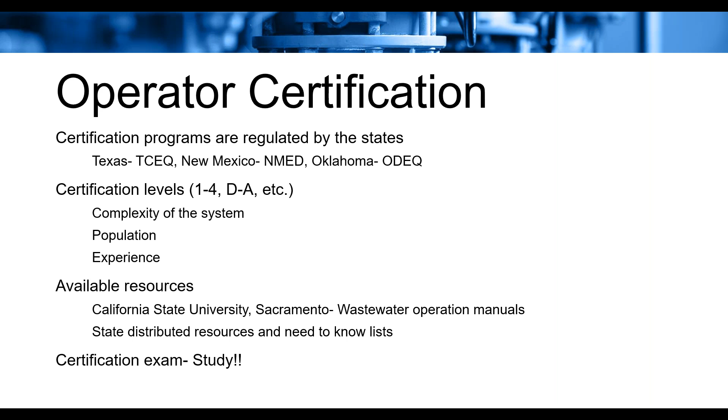So I just want to point out that this webinar is designed to give a good overview and provide you guys with the topics that you're going to become really familiar with for your certification exams.

All right, with that being said, we're going to start our presentation about our modified treatment processes.

Modified treatment processes refer to variations or adaptations of conventional wastewater treatment methods that have been modified to improve efficiency, enhance treatment capabilities, or address specific wastewater characteristics. These modifications can be made to various stages of the treatment process as well.

Examples of this are membrane bioreactors, sequencing batch reactors, advanced oxidation processes, and even constructed wetlands, which may be considered a modified treatment process. I accidentally included anaerobic digestion on there, but we will not be covering that. We're going to talk about constructed wetlands instead.

This webinar will mostly cover membrane bioreactors and sequencing batch reactors, but we will also briefly touch on advanced oxidation processes and constructed wetlands.

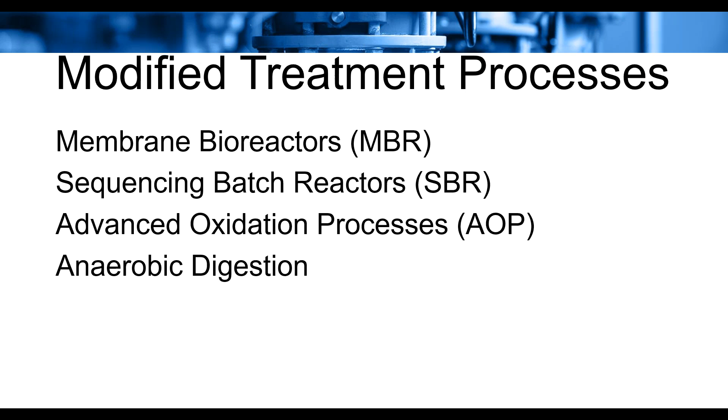So with that being said, we're going to start with our membrane bioreactors. Basically, a membrane bioreactor, or what we're going to call for the rest of the presentation, MBR, is a wastewater treatment process that combines the traditional or more widely used principles of biological treatment and newer membrane filtration technologies.

Just like in typical biological wastewater treatment processes, the biological reactor provides an environment for microorganisms to break down and consume organic matter present in the wastewater. But the caveat is there's also a membrane filtration system, which is the key feature of the MBR that differentiates them from traditional wastewater treatment processes.

This separates the treated wastewater from the microorganisms and suspended solids, and it consists of a fine pore-sized membrane that acts as a physical barrier. The membrane allows the passage of treated wastewater while retaining the suspended solids, bacteria, and other microorganisms within the reactor. The membrane effectively removes suspended solids, pathogens, and most of the dissolved contaminants from the treated water.

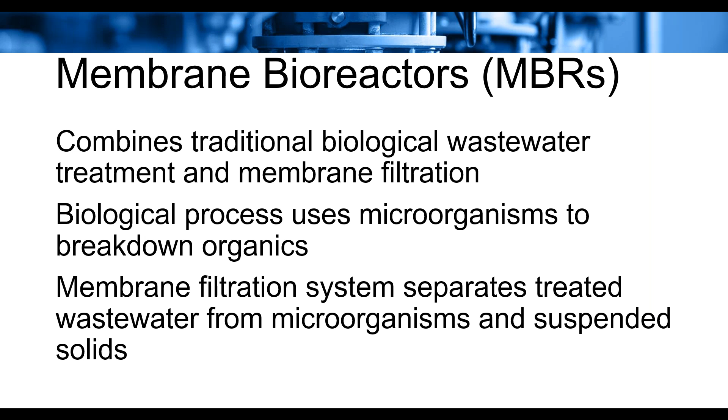So now that we've mentioned briefly what it is, we're going to talk about some of the advantages that MBR systems have.

MBR systems have several advantages over conventional wastewater treatment methods, such as they produce high quality effluent that can be reused for a variety of purposes, such as irrigation or industrial processes.

MBRs also have a smaller footprint compared to traditional treatment systems, since they eliminate the need for a separate clarifier or sedimentation tank. They also allow for higher concentrations of microorganisms, reducing the size of the needed bioreactor. The small footprint means they can be ideal for locations with spatial limitations.

Additionally, MBRs are highly effective in removing suspended solids, pathogens, and nutrients, resulting in improved water quality. They can be operated at higher SRTs than other biological processes, with typical MLSS concentrations of 8,000 to 12,000 milligrams per liter, and even as high as 15,000 to 25,000 milligrams per liter.

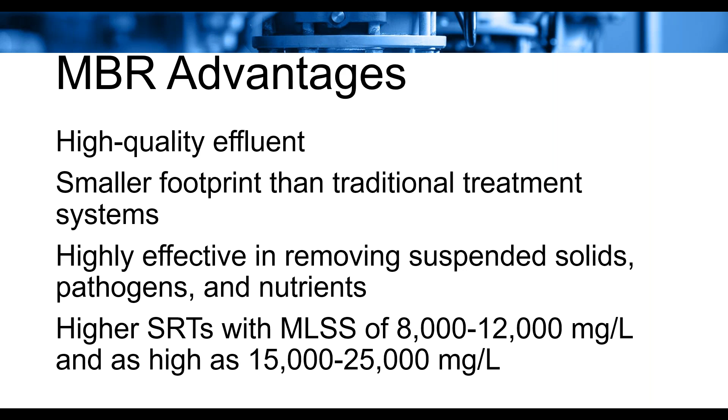So with those advantages, they also have a few issues and challenges that they need to overcome. The fouling of the membrane is the most typical one, and that's due to the accumulation of solids that reduces system efficiency and requires periodic cleaning.

Fouling can be mitigated through a variety of strategies such as air scouring, backwashing, or chemical cleaning. We'll go into that a little bit more later on in the presentation. They also require regular maintenance and monitoring to ensure proper operation. Fouling, maintenance, and monitoring can cause MBRs to be less cost effective than other wastewater treatment processes as well.

Now we're going into a little more detail about the MBR process, and there are usually about 8 steps in the MBR process, which we've laid out here. First, the wastewater to be treated is collected and transferred to the MBR system. The wastewater can come from a variety of sources, such as municipal sewers or industrial processes.

Next, just like in large-scale wastewater treatment plants, MBR wastewater treatment plant processes should include a pre-treatment process to protect plant equipment, especially membranes, which are highly susceptible to damage in the presence of high levels of debris. These membranes are usually made from very fine materials.

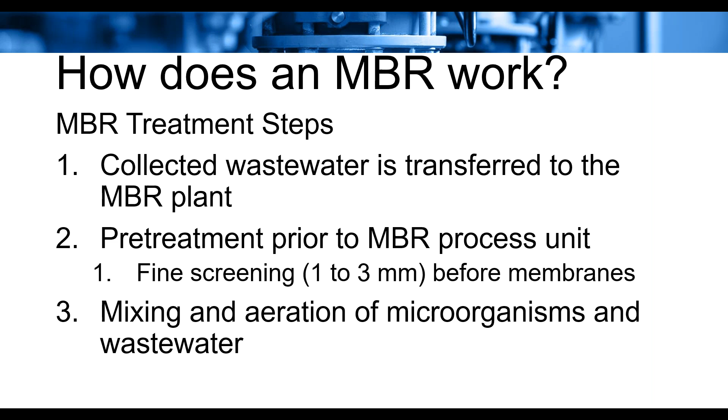Then our fourth step: after the biological treatment, the treated wastewater containing microorganisms and suspended solids is then subjected to membrane filtration. The membrane is located within the biological reactor and acts as a physical barrier with fine pores. As the wastewater passes through the membrane, it filters out the suspended solids and microorganisms. The treated water is collected and now ready for further treatment, use, or discharge.

Now, our sixth step is that within the MBR system, the accumulation of biomass and solids on the membrane surface is referred to as sludge. I'm sure lots of you are familiar with this topic because that's typically how it's referred to in wastewater. And this sludge needs to be managed to maintain system efficiency.

Some MBR systems utilize a portion of the treated biomass within the reactor to maintain the biological treatment process, while excess biomass, known as waste-activated sludge, may be periodically removed. This practice is similar to what we frequently see in activated sludge processes, and the removed sludge can undergo further treatment processes such as dewatering or digestion to reduce its volume and facilitate disposal or beneficial reuse.

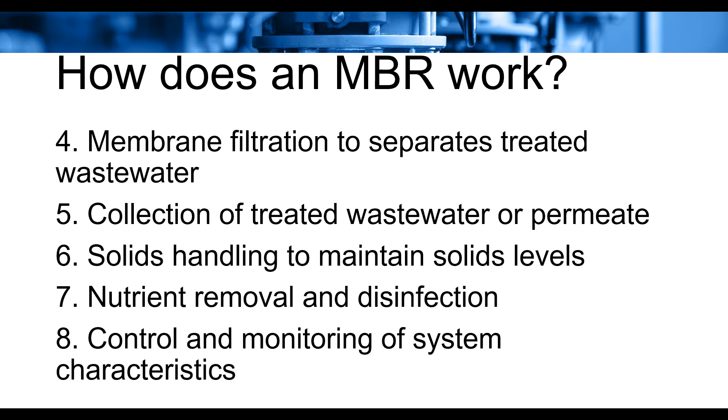And our final step in an MBR, the one that occurs throughout the process, is control and monitoring. MBR systems require regular monitoring and control to ensure optimal performance. Some of these parameters that are monitored may be dissolved oxygen levels, pH, and membrane fouling, and they can be adjusted to maintain efficient operation.

So here is a diagram of the MBR process. And if you'll see, this looks very similar to other activated sludge processes where we'll have our pretreatment followed by our anoxic and oxic zones. But the difference is that you'll typically see an oxic zone with the membranes in it, over here in the middle of the screen where it says aerobic plus ZeeWeed, which is a brand provided by the EPA fact sheet.

Then after that, you have your turbidity readings and your clean-in-place tank, which monitors the turbidity of the water to verify if it's being filtered correctly, and will actually rerun the water through the filters if needed. And this is a configuration for an immersed MBR.

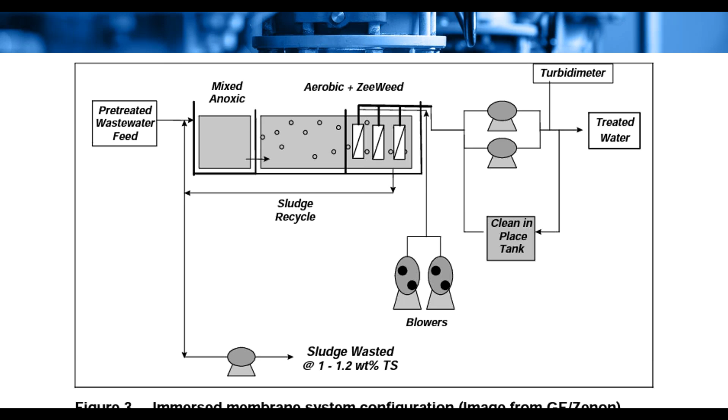So now that we know about the overall process of MBR wastewater treatment, let's talk more in depth about the crucial role membranes play in MBR systems. They facilitate the separation of suspended solids, microorganisms, and other contaminants present in the wastewater. They act as a physical barrier and selectively allow the passage of water molecules while retaining the larger particles and microorganisms.

So let's go over a couple steps of what exactly these do, because understanding membrane function is crucial to understanding our MBR. So the filtration process in MBRs occurs as the wastewater passes through the membranes. The wastewater contains suspended solids, microorganisms, and treated water like we talked about. The treated water applies to one side while the contaminants are on the other. I'm going to show you guys a diagram on the next section about how that occurs.

The membranes are designed with pores of a specific size, depending on the desired filtration efficiency and the characteristics of the wastewater being treated. Membranes in MBRs employ a size exclusion mechanism to separate the particles and microorganisms from the treated water. The membrane pores are typically in the range of microfiltration to ultrafiltration. As the wastewater flows through the membrane, particles larger than the pore size are retained on the membrane surface or within the membrane structure.

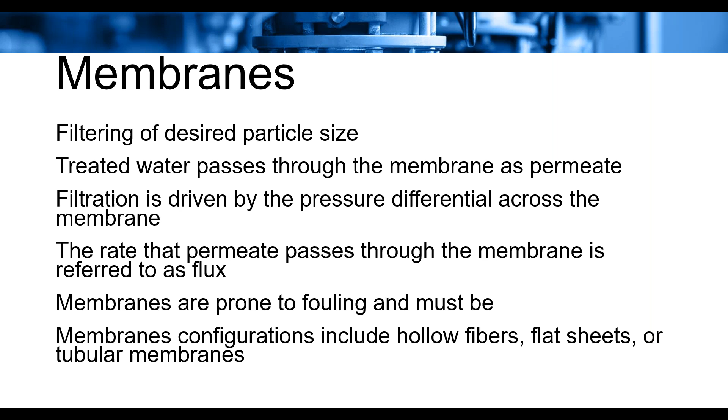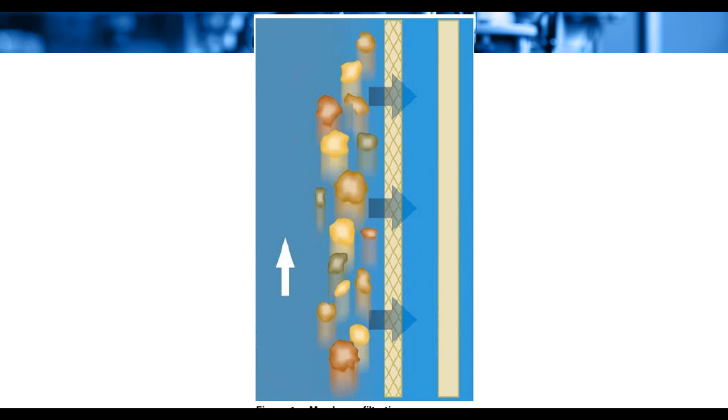So this is typically what's happened on the left. You'll see particles will be in there, and the water looks a little dirtier. On the right, there'll be clean water. Also, if this is an immersed system, biological activity will be continuously going on the left side as well, breaking down organics.

We've touched on this previously, but I wanted to reiterate that there are two products created during membrane filtration. The first is permeate, which we've already described as the clean water product after the filtration process within the MBR. Permeate is the desired product of the MBR process, and the quality of permeate dictates the design considerations and operation optimization of the MBR.

Then the other product we want to know is concentrate. The concentrate refers to the concentrated wastewater stream that remains after the membrane filtration process. It is also known as the reject stream or the retentate. The concentrate contains the majority of the solids, microorganisms, and dissolved contaminants that were present in the influent wastewater.

In many cases, MBR systems may incorporate a concentrate recycle or reuse strategy. This involves redirecting a portion of the concentrate stream back into the influent wastewater to enhance treatment efficiency or reduce the overall volume of concentrate generated. This approach requires careful consideration of the impact on the system, how much this may increase fouling, and potential contaminants in the recycled concentrate.

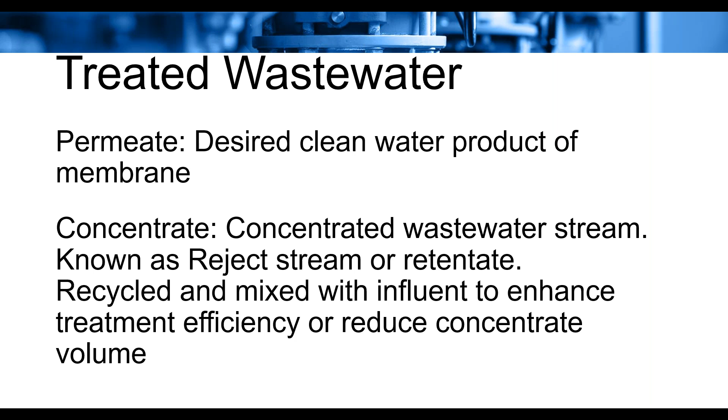So next we're going to talk about pressure. As we mentioned, membrane filtration relies on pressure and the pressure differential across the membrane for the process to proceed. Now, there are two types of pressure differentials that may exist across an MBR membrane.

There is the transmembrane pressure, or TMP, created by applying a high pressure on the feed side of the membrane compared to the permeate side. This pressure difference pushes the wastewater through the membrane, allowing clean water to pass through while retaining the solids and microorganisms. It can be created in a variety of ways, including a pump-driven system, where a pump pushes the wastewater on the concentrate side, and the clean water will force its way through the membrane to the permeate side.

There are sensors placed on both sides of the membrane to measure the pressure differential, and it's used to monitor for changes that indicate fouling or other issues in the system.

In addition to the transmembrane pressure, the hydraulic pressure generated by the flow of the wastewater can also contribute to the driving force for membrane filtration. As the wastewater flows across the membrane surface, the hydraulic pressure helps propel the water through the membrane pores, facilitating the separation of the treated water from the solids and microorganisms. It's also worth noting that the pressure required for membrane filtration can vary depending on the membrane type, configuration, and the specific characteristics of the wastewater being treated.

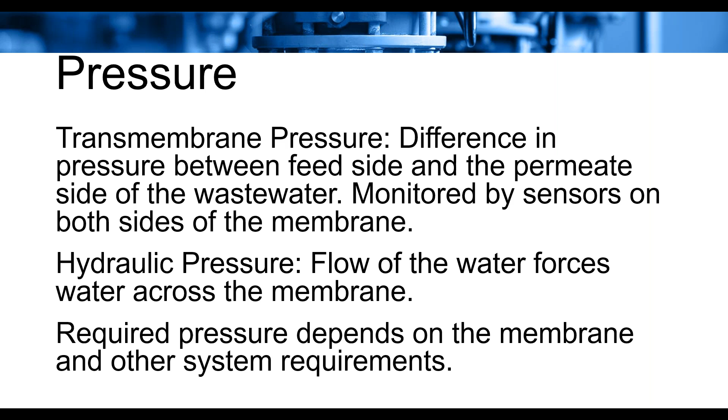As we mentioned earlier, flux is the rate at which treated water passes through the membrane per unit area, and this is typically driven by the pressure we just talked about. Flux is typically expressed in terms of the volumetric flow rate per unit membrane area, such as liters per square meter per hour, as shown here, or gallons per square foot per day, also referred to as GFD. It represents the amount of permeate that can be produced or processed by the membrane in a given time.

It's important to remember that MBRs generally operate at a flux between 10 and 150 LMH. This varies widely based on the system. Some things that influence flux are the transmembrane pressure, membrane characteristics, the fouling that's occurred in the system so far, and membrane integrity - how well that system may be holding up. The relationship between fouling and flux is especially important, because increased fouling leads to a decrease in your flux rate.

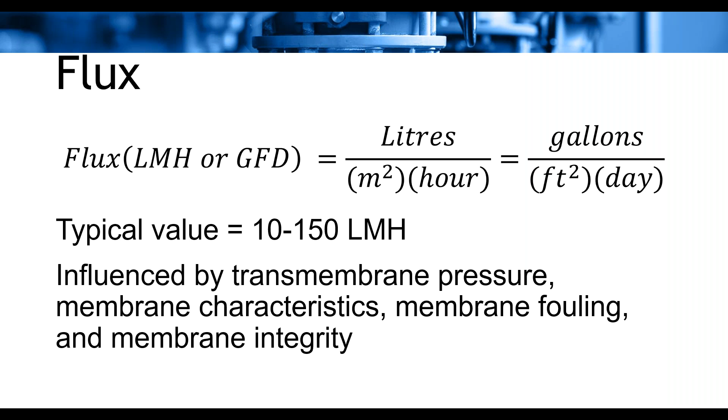As we mentioned before, fouling is a frequent issue for MBRs. It decreases your flux rate and the overall performance of your MBR. Here are a couple examples of how this occurs. Fouling is caused by fine suspended solids in the influent wastewater that can deposit and accumulate on the surface of the membrane and within the pores, including organic matter, colloids, bacteria, and other particles.

The first we're going to talk about is biological growth, which is typically caused by microorganisms, including bacteria and biofilms that attach and grow on the membrane surface, leading to biofouling. The growth of microorganisms can result in the formation of a slimy layer that impedes the permeate flow.

Then there is scaling, which occurs when dissolved inorganic compounds in the wastewater, such as calcium carbonate or calcium phosphate, precipitate and form deposits on the membrane surface. Scaling can also reduce the effective pore size and decrease membrane permeability.

The last cause of fouling that we're going to talk about is organic fouling, where certain organic compounds in the wastewater, such as proteins, humic substances, or oils, can adsorb onto the membrane surface, resulting in fouling. This adsorption can occur due to electrostatic interactions or hydrophobic/hydrophilic interactions.

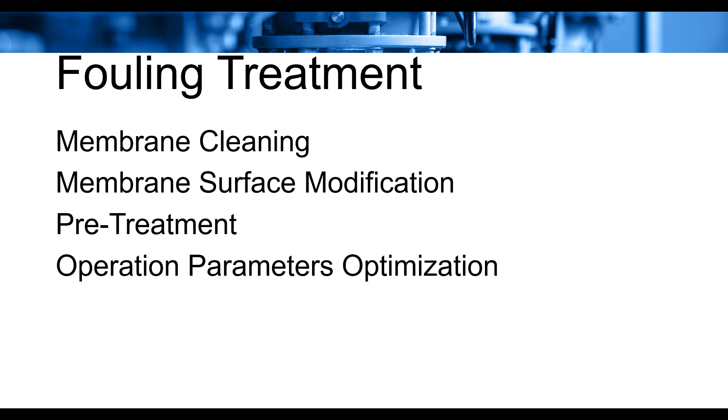There are a couple of different ways that membranes can be configured, and we're going to talk about those since we've finished with principles. Membranes can be immersed directly into the bioreactor, as we saw earlier, or installed as a separate system following the biological process. In an immersed membrane bioreactor, the membranes are submerged directly into the mixed liquor within the biological reactor. The membranes are typically placed within the reactor as modules or bundles, and they are fully immersed in the wastewater. The mixed liquor flows over and around the membranes, and the filtration process occurs as the treated water passes through the membrane pores.

In a separate membrane bioreactor, the membranes are physically separated from the biological reactor, and the mixed liquor from the biological reactor is transported to a separate filtration tank or module where the membranes are housed. The filtration tank is designed to create a pressure difference across the membranes and allows the treated water to pass through while retaining the solids and microorganisms.

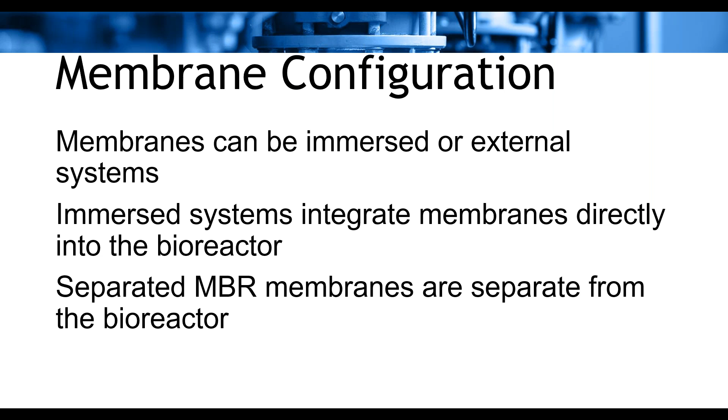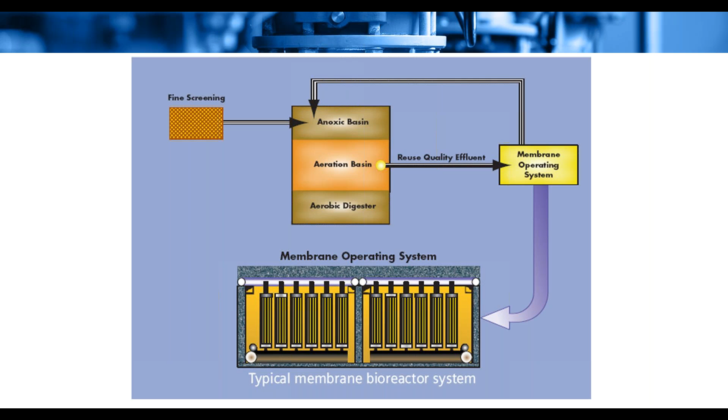We saw this one earlier, but this is an example of the immersed membrane system. As you can see, the biological process will be happening at the same time as filtration is occurring.

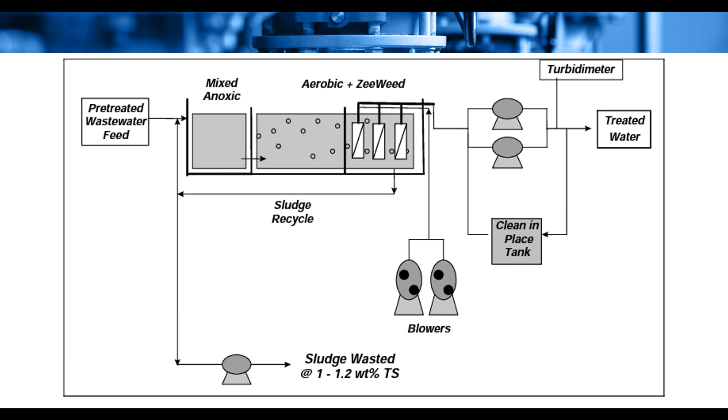So there are two common types of membranes used in the MBR system: microfiltration, which we mentioned earlier, and ultrafiltration. Microfiltration is referred to as MF and ultrafiltration as UF.

MF membranes have a larger pore size and provide relatively lower filtration efficiency, and the pore size is typically 0.01 to 0.4 micrometers. While they have lower filtration efficiency, they do allow for the treatment of more water.

UF membranes have smaller pore sizes and offer higher filtration efficiency. The pore size for UF membranes is 0.01 to 0.1 micrometers. The choice of membrane type depends on the specific application and the level of treatment required, which may be dictated by a plant's permit.

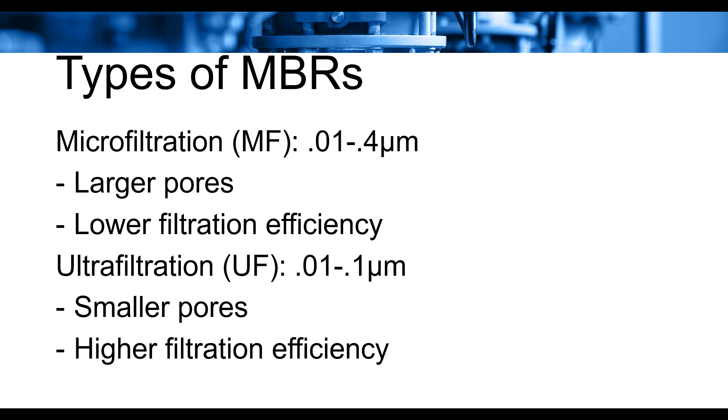The most common type of MBR system utilizes hollow fiber ultrafiltration membranes, and the second most common is the flat plate microfiltration membranes. Here's an example of the hollow fiber membranes.

Water flows, like we mentioned earlier, from the outside of the membranes to the inside in this type of membrane media, and that typically requires either outside pressure pushing the water, or in these cases, it would actually be a vacuum system that attaches to the module which holds all the fibers.

These fibers are about 1 to 3.5 millimeters, which is slightly wider than a regular strand of hair. They come in big tubes which have thousands of them, and the water's pushed into the middle, and the permeate is sucked through with a vacuum system.

So that's about what we're going to cover today for the basics of MBRs. Now we're going to move on to talk about our sequencing batch reactors. But before that, we have a couple of poll questions.

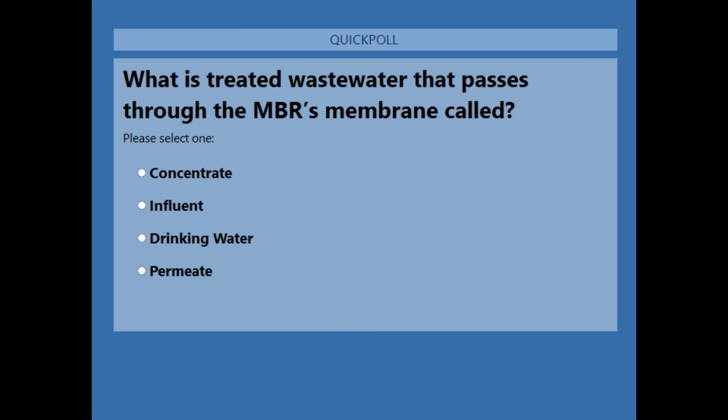Next poll question: what is treated wastewater that passes through the MBR's membrane called? Get those answers in, I will be closing the poll in 3, 2, 1. All right, most people got it right again with D, permeate. 79% of them did. Good job.

If you remember, concentrate is the opposite, or the counterpart, to permeate, and then influent is typically your raw water that comes in. And to be drinking water, there would probably be a lot more process that would be needed.

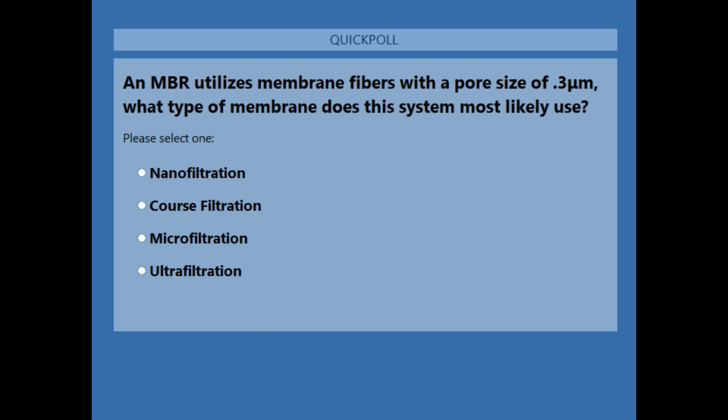All right, the third poll question: an MBR utilizes membrane fibers with a pore size of 0.3 micrometers. What type of membrane does this system most likely use? Get those answers in, I'll be closing the poll in 3, 2, 1. All right, again most people were right with C, microfiltration. 70% of them were. Good job, guys.

We didn't really cover nanofiltration, but that's actually going to be even smaller than ultrafiltration. If you remember, microfiltration size is between 0.01 and 0.4 micrometers, and ultrafiltration is 0.01 to 0.1. So it would fall in that microfiltration range. Coarse filtration is typically like sand filtration and stuff like that.

All right, with that, we're going to go on to, like we said, our sequencing batch reactors.

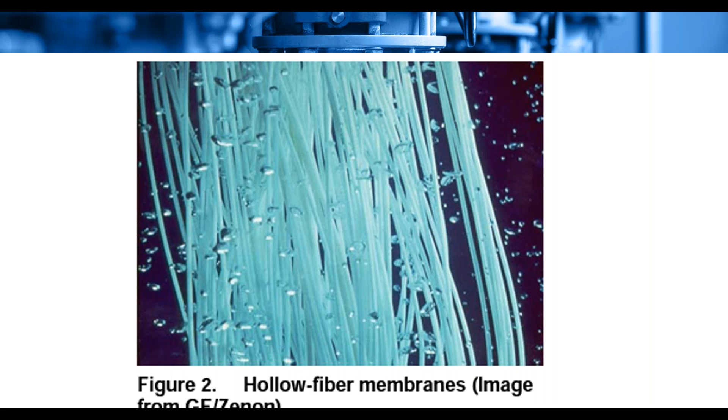I'd like to mention that this section will be a little shorter than the MBR section, and that's because it's important to understand the configuration and sequence differences that SBRs have from traditional processes, but the principles in chemistry are going to be the same that we've discussed in previous webinars. We actually plan on going into more detail in the future for biological processes, specifically activated sludge.

Sequencing batch reactors, or SBR systems, are a type of biological wastewater treatment system, commonly used in small to medium-sized wastewater treatment plants, as well as decentralized and industrial applications. SBR systems operate on a batch process similar to fill and draw systems, which were first developed between 1914 and 1920. In this batch process, wastewater is treated in discrete batches rather than continuously.

The treatment process consists of several phases that occur sequentially in a single tank during a single cycle. Typically, SBR systems use 2 or more batch reactors in tandem to maximize efficiency, create redundancy, and allow flow to be continuous throughout the plant. The EPA has determined that SBRs and activated sludge systems are essentially the same thing, but that SBR operates in time rather than in space. I'll go into why that is.

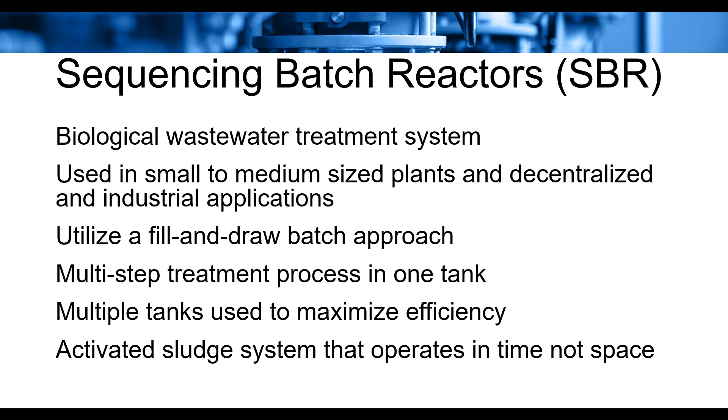Here's a quick overview of the SBR wastewater system. This is why it operates in time, because all this is occurring in one single place, whereas in most facilities, these processes are typically broken up into different processes and occur sequentially as it moves through the plant.

The typical first step in an SBR plant is to remove debris and grit, just like we would in the MBR or traditional wastewater treatment plant. Then, after the trash and debris has been removed, it is time to fill the SBR tank with the influent wastewater. The SBR tank is kept partially filled with the desired biomass as a way to seed the bioreactor, and the influent wastewater to be treated is introduced to the partially filled tank. The influent wastewater is controlled to achieve a desired flow rate and hydraulic retention time.

Once the tank is filled, the aeration phase begins, and oxygen is supplied to the tank to provide mixing and to create an aerobic environment, which promotes the growth of microorganisms that consume organic matter and pollutants in the wastewater. After the aeration phase and biological reactions are complete, the aeration and mixing is discontinued and the wastewater is allowed to settle.

During this phase, the suspended solids and biomass in the wastewater settle to the bottom of the tank due to gravity. That's just like we would see in a primary or secondary clarifier.

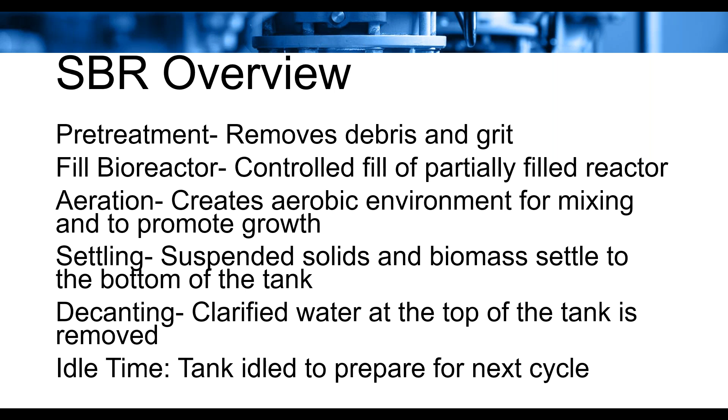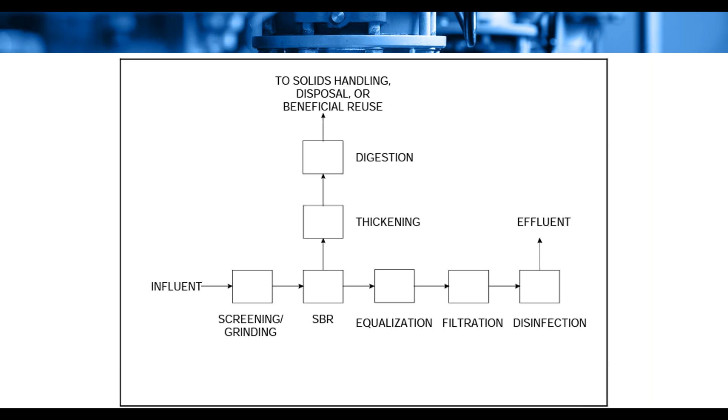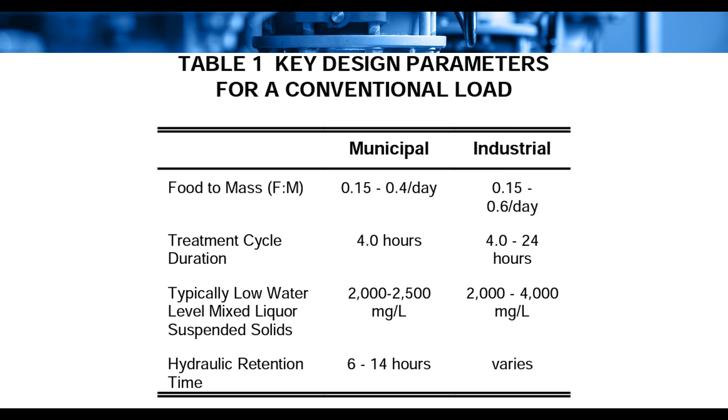Here's a couple quick parameters operators should understand about the SBR. It should be noted that some of these seem rather obvious, but the actual value of the parameter is usually dictated by the manufacturer and the requirements of the system. And when I say obvious, I just mean like the naming convention.

The first is fill time, which refers to the duration of the filling phase in SBR. It's important to control the fill time to achieve consistent hydraulic retention time and influent flow rate. The fill time can be adjusted based on the influent characteristics, treatment goals, and the desired process performance.

Then we also have the aeration time, which is the period during which the wastewater is aerated in the SBR, and the duration of the aeration time affects the efficiency of treatment and the level of oxygen available for microbial activity. Then there's settling time, which is the duration allotted for the settling phase in an SBR. Sufficient settling time ensures effective separation of the solids from the treated water and improves the effluent quality.

Then there's decant time, which refers to the duration of the decanting phase in an SBR. Proper control of decant time is necessary to avoid disturbing settling solids and excess loss of biomass in the effluent. So this is just like in a clarifier where you want to make sure it's consistent so you don't create something like short circuiting.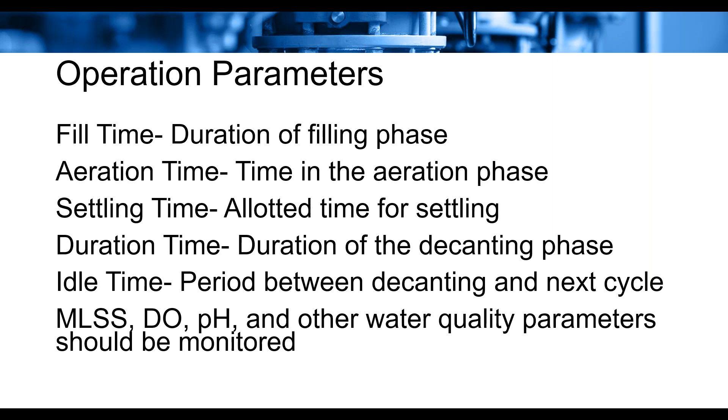So the first is advanced oxidation process, or AOPs, which are a group of chemical treatment techniques used to remove organic and inorganic pollutants from water and air. AOPs involve the generation of highly reactive hydroxyl radicals or other powerful oxidizing agents, which are capable of degrading a wide range of pollutants that are resistant to conventional treatment methods.

The main principle behind AOPs is the generation of these highly reactive species, which can oxidize and break down organic and inorganic compounds into smaller, less harmful molecules. The hydroxyl radicals generated during AOPs have an extremely high oxidation potential and can react with a wide variety of contaminants, including persistent organic pollutants, pharmaceuticals, industrial chemicals, and dyes.

Some common AOPs are ozone-based processes, which use ozone either exclusively or in combination with hydrogen peroxide and ultraviolet light. Ozone is a powerful oxidizing agent and can degrade various organic compounds through direct oxidation or the generation of hydroxyl radicals, which occurs when ozone mixes with water.

There are also Fenton's reagents, which are iron or ferric derived, and they utilize a combination of hydrogen peroxide and ferrous ions under acidic conditions. There's also photochemical processes, which involve the use of ultraviolet light, which either alone or in combination with hydrogen peroxide create those oxidizing agents that we're looking for.

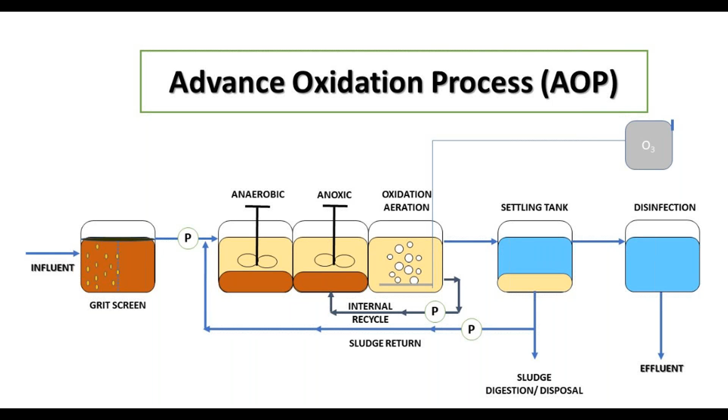So here's a diagram of an AOP. As you can see, the process follows typical wastewater processes with the addition of ozone instead of oxygen. Ozone breaks down persistent contaminants, and as it reacts with water, it is converted to oxygen. Then oxygen just acts as it normally would in an activated sludge, and nitrifying bacteria use the oxygen to convert ammonia to nitrate.

So here's a quick pros and cons list. AOPs provide effective removal of pollutants, such as the normal pollutants we would usually take care of, but also persistent chemicals. They have a broad spectrum of treatment, which includes pharmaceuticals and personal care products, pesticides, dyes, and other industrial chemicals that you're not going to typically see in traditional wastewater treatment.

There is also a lot of environmental compatibility because they produce free radicals which exist normally in the environment. They also exhibit really high treatment efficiencies and removal efficiencies.

Now, some of the cons are that they can be energy intensive because you're including the addition of options such as UV light or ozone, which takes a lot of power to generate. This increases the cost, which is also affected by the additional chemicals that you might need.

And there can also be possible harmful byproducts that can be created. I'm sure a lot of us have heard of disinfection byproducts, and you've got to be careful with these to make sure those aren't produced. But as long as those aren't produced, all the byproducts we see are stuff like hydroxyls, like we talked about. And there can be limited scaling abilities, so these are not always useful for large scale use, or it cannot always be expanded out for that.

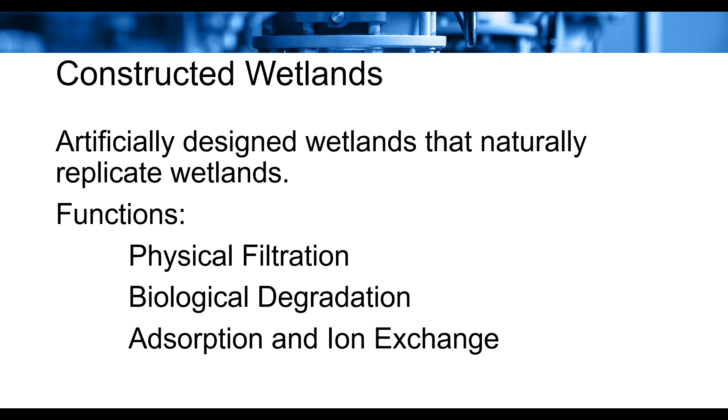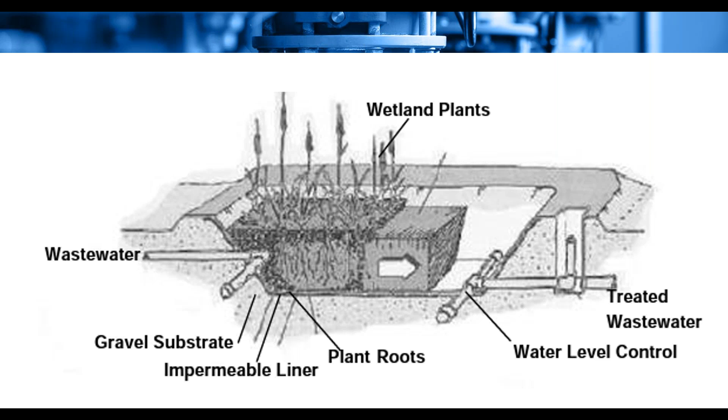So some quick pros and cons. In summary, constructed wetlands provide effective water treatment. They're good at removing nutrients, breaking down organic matter, and removing suspended solids. They're also cost effective because they don't need a lot of energy inputs or additional chemicals. They add to sustainability and ecological benefits since they promote biodiversity and create wildlife habitats.

They also provide aesthetic value since they're much better to look at than other wastewater processes, and can even offer areas for viewing wildlife and educational areas. And they offer versatility and adaptability because they can be tailored specifically to the environment they're in, the treatment needs, and the site conditions.

Now, some of the cons are that they have large land requirements and may not be suitable for densely populated areas. And they have a long startup time, which can take several months or even years to get up to suitable treatment standards. They have specific design and maintenance requirements that must be carefully planned for.

And we did mention that in the first slide. They are also affected by climate and seasonal variation and can break down in extreme weather, or can be overloaded during high precipitation events, or can even start to die off during drought events. They have limited capabilities to treat certain pollutants, such as man-made chemicals that we talked about for the AOPs.

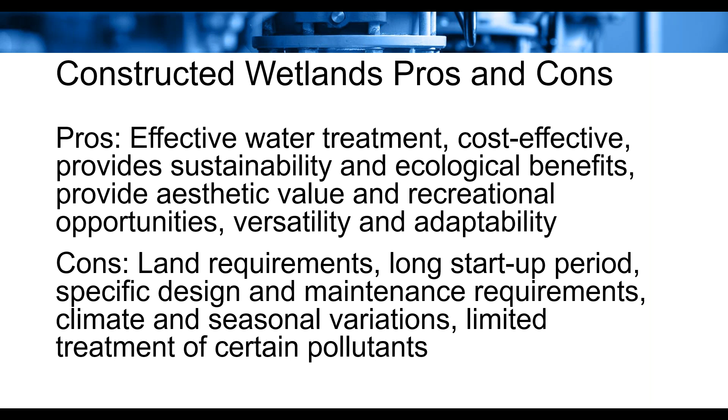Hi AJ, yes so we do have a couple of questions. The first one is, could you please elaborate on the environmental compatibility as a pro of AOP?

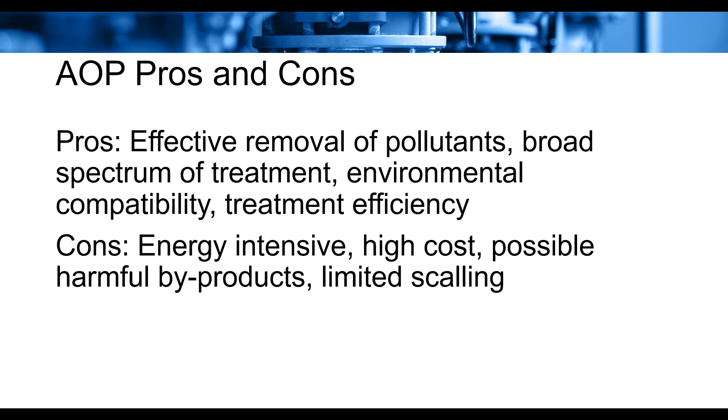Typically the strategy for AOPs is to just create ozone or hydroxyl. Maybe I could include a slide about that. Hydroxyl is basically just an oxygen and a hydrogen molecule, which is part of, as many of you know, water. Ozone is just 3 oxygen molecules combined. They're very reactive, and they tend to react with the contaminant, pull off a hydrogen molecule so they become less harmful, or it degrades them and they start to break down, forming smaller, less harmful contaminants. So you might see things such as water being formed, or if it's a complex biological organic, it's going to pull off a bunch of hydrogen molecules or form hydroxyl groups on there that tend to make the whole thing break down. Then they become smaller constituents that are less harmful to the environment.

Perfect. And then the next question wants to know what the difference between adsorption and absorption is.